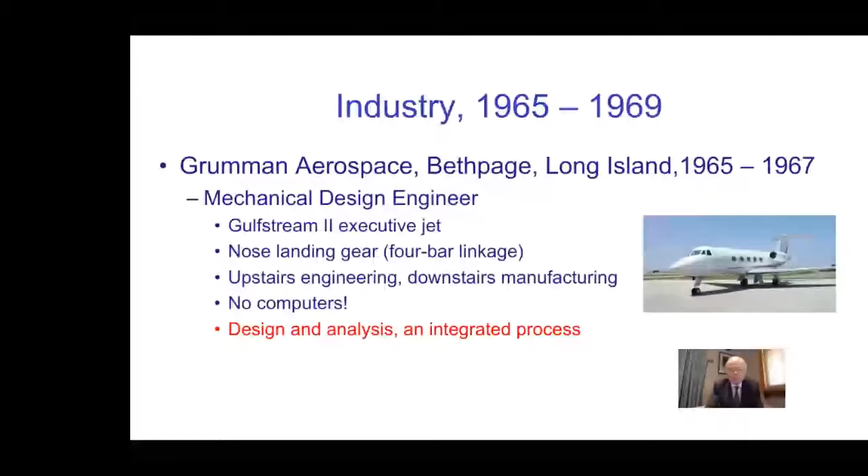So then, after I completed my master's, I went to General Dynamics Electric Boat in Groton, Connecticut, where submarines are built. And I was a research and development engineer. So that was a new experience altogether, and obviously one that had a great effect on shaping the rest of my life. Well, there we had computers, and we had a Univac 1108 with an enormous drum storage device. So this was a supercomputer at the time.

And the group I was in was very adept at matrix methods of structural mechanics. And those procedures had actually become sophisticated at that time. They were computer-based, but they were basically structures composed of beam elements, beams, frames, things of that nature. And they were doing calculations of over 10,000 degrees of freedom around 1965, which is amazing in retrospect, given the facilities that were available.

Now, in addition to beam-type models, they could model the hulls of submarines, the overall structure, internal and external, by using lattice analogies. And they employed the Hrennikoff method. So that was something that everybody in our group knew very well. It was developed by Alexander Hrennikoff, who did his PhD during the Second World War years at MIT. And he further developed that as a professor at the University of British Columbia the rest of his life.

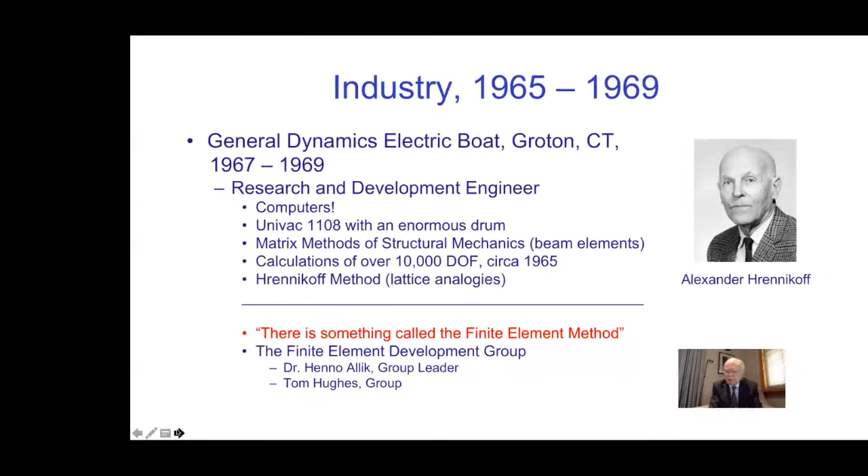Now, when did the finite element method really start? To me, in engineering, it really started around 1956. And there was an extremely important paper that was very influential that was published at that time, namely a paper of Ray Clough's in collaboration with Jonathan Turner, Harold Martin, and L.J. Topp. And that paper came out of Boeing's research lab. They were very active, as were many other aerospace industries, developing finite element type procedures. Now, the name had not even been given yet. Ray Clough actually coined the term finite elements sometime in the early 1960s.

Now, another seminal work on finite elements was the work of John Argyris in Europe. He divided his time between Stuttgart in Germany, where he had an institute, and Imperial College. And he published papers in the mid-1950s that were quite wonderful papers describing various ways of thinking about finite elements, the force method, the displacement method. And at the very end, you could see that he really had discovered the first, what you might call, continuum finite element, a 4-node panel element. And so these are the papers that I would say really started things going. Although it moved very, very slowly in the early years.

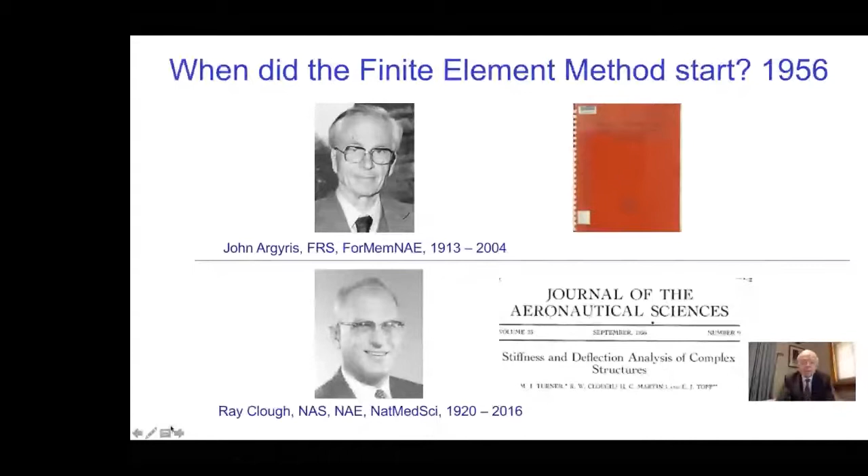So this is a plot that came from Web of Science, where I put in the topic finite element, and then looked at the number of papers published each year. You'll notice between 1956 and 1963, 0 papers. You find nothing. It wasn't until later that papers started to pop in. And of course, that has to do with 2 reasons. One is most people were publishing in conference proceedings and a few books at the time, and not in archival journals. But the other reason was, of course, that the name hadn't come about and hadn't stuck, and that was due to Ray Clough again in the early 1960s.

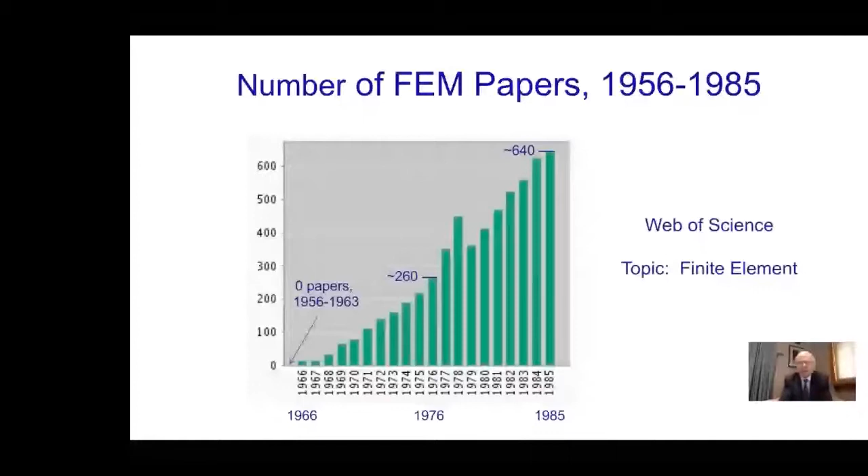So thereafter, papers started to appear, and they started to grow, and they were growing rapidly, but only a little bit faster than, say, linearly over the years. But after 30 years, in 1985, there were 640 papers that year. So that took 30 years from the inception, which is quite a long time when you think about it. And if you look at the number of citations, though, the citations to the paper were growing much faster. They were growing exponentially. But they only got up to about 3,000 in 1985, again, 30 years after the beginning of the method. So remember that number 3,000. I'll come back to that when I talk a little bit about isogeometric analysis later on.

So I decided that I wanted to pursue a career in research. I really loved research. And I applied to various places, but I felt the place for me and the one I really wanted to go to was Berkeley. They were active and one of the prime academic centers of finite element research, but they also had excellent mechanics and mathematics. And I had decided that's what I wanted to focus on. I would leave finite elements, patch up my background in mechanics and mathematics, and then perhaps come back to finite elements toward the end of my PhD or after I graduated.

I took many courses there. And one of the reasons I was able to take so many courses, and ones that I chose to take without any restrictions on my program, was I had a great advisor named Karl Pister. And Karl gave me complete freedom to select my courses. There were luminaries in mechanics and mathematics at Berkeley, and I took courses from many of them. Green, Naghdi, in mathematics, Smale, Kato, Marsden, Chorin, etc.

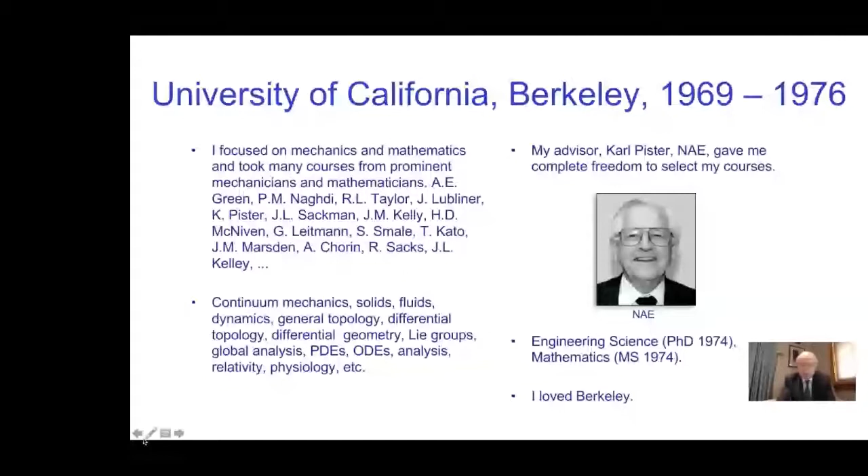Now, my thesis was actually in arterial pulse propagation, blood flow, fluid structure interaction, topics that I've come back to in later years. And that expressed my initial interest in cardiovascular problems. So that was in 1974. Now, my committee, during the time I did my thesis, which was actually over even less than a year, consisted of Kobi Lubliner here, who is famed perhaps in the mechanics community for his book on plasticity, Alex Chorin, who's a very famous mathematician, a National Medal of Science laureate, and Stan Berger in mechanical engineering. Now, Stan was the only person on the committee that really had an intimate knowledge of blood flow.

But when I needed signatures for my thesis, he had left on sabbatical, and I was not going to be able to get them in time. So we made a quick switch in the committee and put Bob Taylor on it. So he wound up signing my thesis, although he was not my advisor. I'll talk a lot more about Bob shortly, because we had a great interaction.

I should say, Kobi was a great thesis advisor. This was the old days. You didn't get a lot of direction. You just went off and you wrote a thesis by yourself and came back and sort of presented it to your committee to see if it was good enough. And I met with Kobi once about 6 months into my work and told him what I was doing, just orally. And he said, "That's great, write it up." So I did. And that's how that went in those days. This is a different business nowadays.

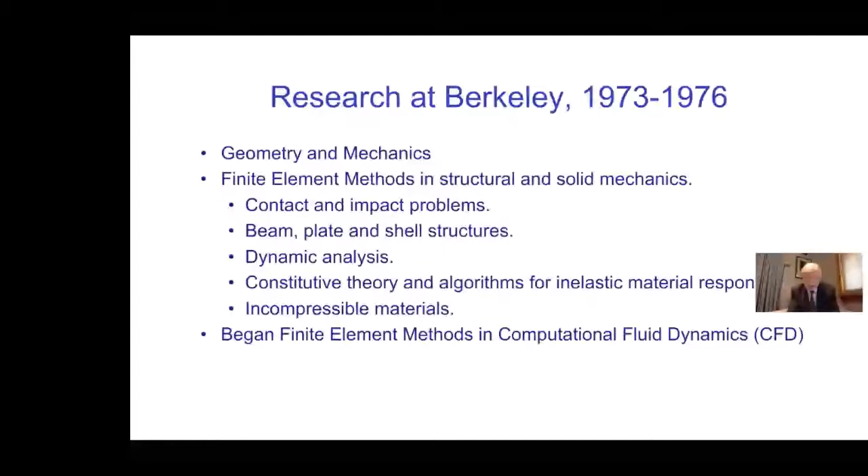I'd like to say a little bit about Jerry Marsden. I worked with Jerry on geometry and mechanics. I had taken all of the advanced sequences that were the types of mathematics that he was using at the time, global analysis, geometry, things of that nature. And he was to teach a seminar course on the use of global analysis in fluid mechanics and nonlinear elasticity theory.

So I decided to go talk to him and see what he was going to do. And I already knew more or less what he was going to do in fluid mechanics because he had written a wonderful paper on the incompressible Euler equations. And I asked him what he was going to do on nonlinear elasticity. And he said to me, "I really don't know. I don't know anything about the subject. I just hope I can learn something in time."

So I said, "Well, I know quite a bit about it. I could show you that." And he said, "Well, okay, here's the deal. Why don't you just take the course and write up about 10 pages each week and give them to me on nonlinear elasticity in the language I know, which was differential manifolds, differential geometry, things of that nature." So that's what I did. And that in some sense became the first draft of our book.

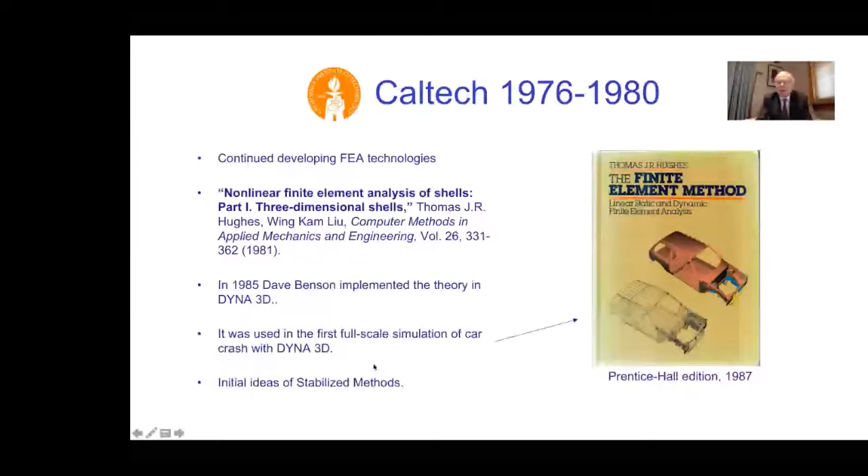Now, that elementary example of car crash really augured in a whole change in industry. Cars are now designed on computers. They're crash analyzed every day all around the world by every car manufacturer. And it's a very sophisticated business. So these are calculations with LS-DYNA.

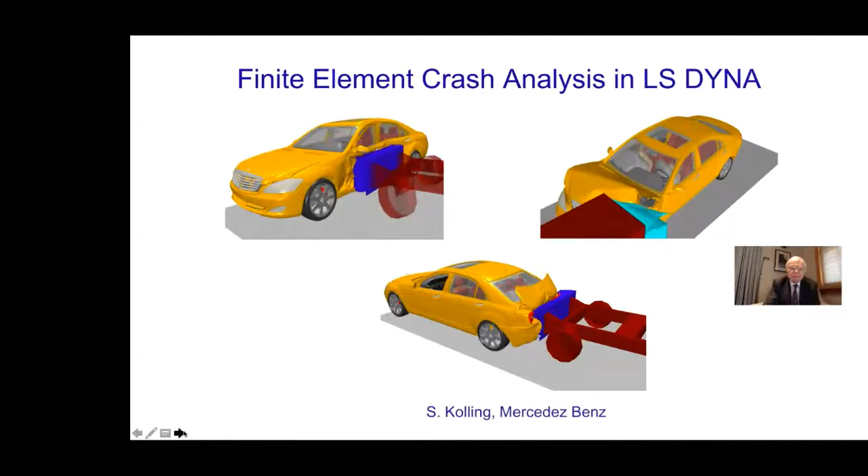So in 1980, I went to Stanford, continuing my research in finite elements, but I became more and more focused on computational fluid dynamics, especially compressible flows. I was getting support in that area from various sources, and the work was immediately put into some industrial flow codes like those at Dassault, and then ultimately at Boeing as well.

I continued developing stabilized methods and variational multiscale methods. And the basic mathematical theory for that was worked out by Claes Johnson and his colleagues. And that really cracked through, and we saw how these things could be essentially mathematically designed and analyzed thereafter. And I wrote a lot of papers on that.

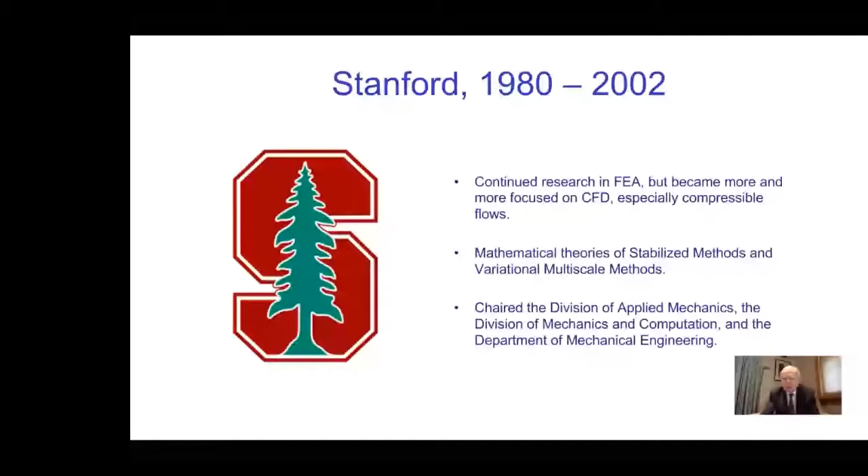At Stanford, I did some administration. I chaired the Division of Applied Mechanics. I chaired the Division of Mechanics and Computation, which it had morphed into, and for a short while, the Department of Mechanical Engineering. My proudest accomplishment as an administrator, and I have to admit that I was not a very enthusiastic administrator, was hiring these three individuals who became superstars in their fields of endeavor.

The first was Juan Carlos Simo, whom I think everybody knows for his work in computational mechanics. Huajian Gao, who is absolutely well known in this community as a speaker, I hope, if everything goes well, in a little while. And Andrew Stuart, who is now an outstanding applied and computational mathematician.

While at Stanford, the second edition of my book came out, my finite element book, the Dover edition. And I finally got out the book that Juan Simo and I had commenced many years before, but had been left dormant for quite a few years. So I was urged to get that out, finally got that out in 1998. And I think that's pretty well known in the mechanics community.

The major works that I did at Stanford concerned CFD applications, stabilized methods, variational multiscale methods, and patient-specific modeling of blood flow. So in the area of stabilized methods, the first and most famous paper, the SUPG paper, appeared in 1982. A couple of the papers in a 10-part series that I wrote, it was more on compressible flows, but this one was on the Stokes equations here.

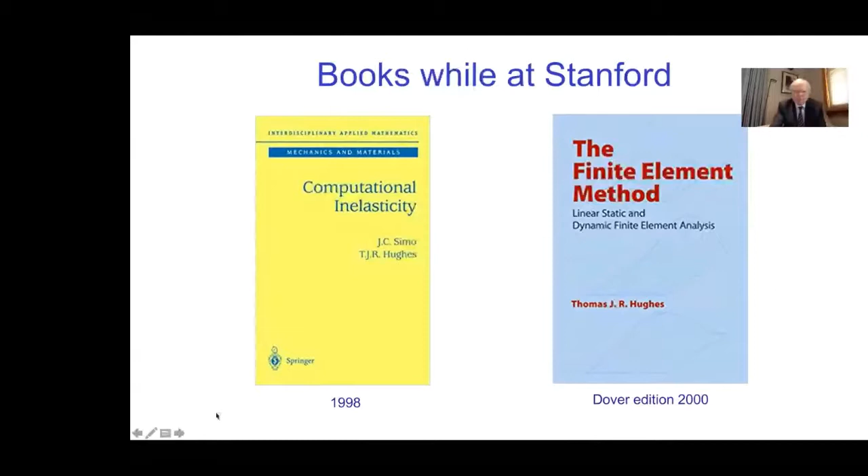It was how to circumvent the Babuška-Brezzi condition and develop stable methods that would accommodate essentially arbitrary orders of interpolation, equal order in particular. So that's had a lot of impact in analysis. It opened up a much wider range of interpolations to be used in CFD for incompressible problems. And then this paper is sort of a framework of some of the methods that we used in ultimately incompressible flow analysis, Galerkin least-squares method.

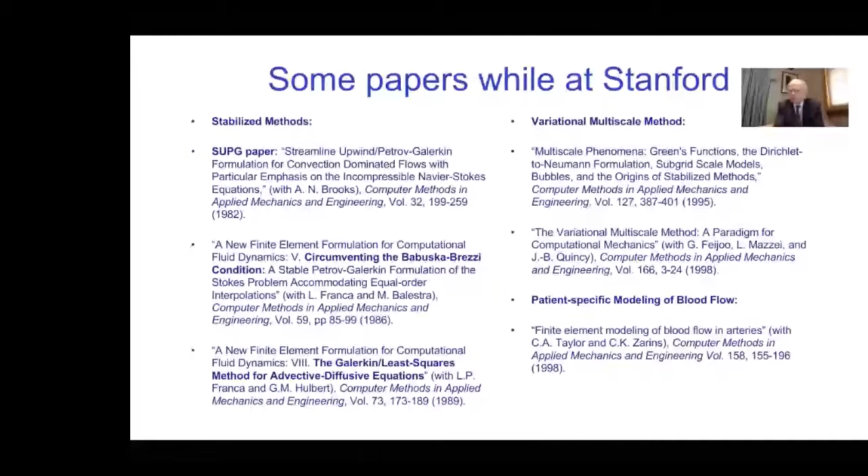The first two variational multiscale methods, which not only explained the origins of stabilized methods, but created procedures for multiscale analysis, modeling turbulence, for example, were these two papers. And then this paper with Charlie Taylor, my PhD student, and Chris Zarins, my colleague, who was the chief of vascular surgery, was the paper that really began patient-specific modeling of cardiovascular problems.

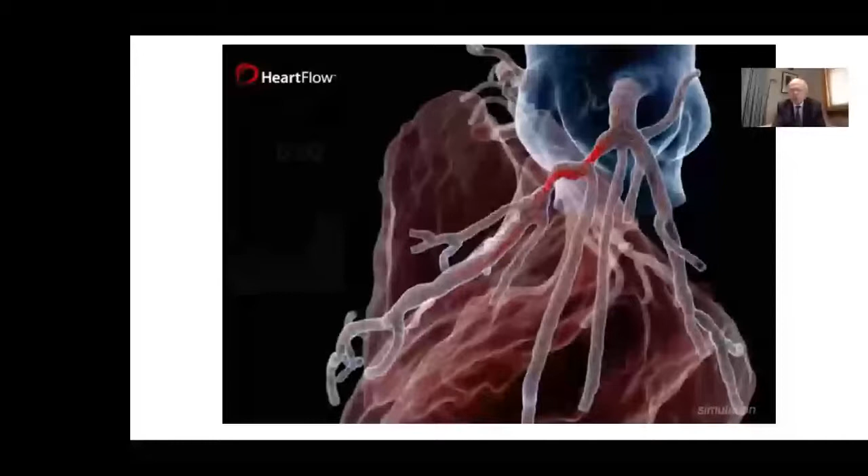And to make a long story short, and to fast forward, Charlie and Chris eventually left Stanford. Charlie became a professor at Stanford. They eventually left in 2007 to start HeartFlow, which is a company whose main product is a diagnostic technology of coronary artery disease. And what you can do with that is you can actually calculate the pressure drops, the so-called fractional flow reserve, that is a gold standard in cardiovascular medicine. And you can do it non-invasively, just from a CT scan.

Otherwise, if you do it in the traditional way, you have to insert a catheter, typically through the groin, thread it up through the aorta into the coronary arteries, and then thread it through a very vulnerable area where you have a stenosis to measure the pressure drop. So that company is now marketing this product. In fact, it was our patent, this technology, that was the first patent obtained by HeartFlow.

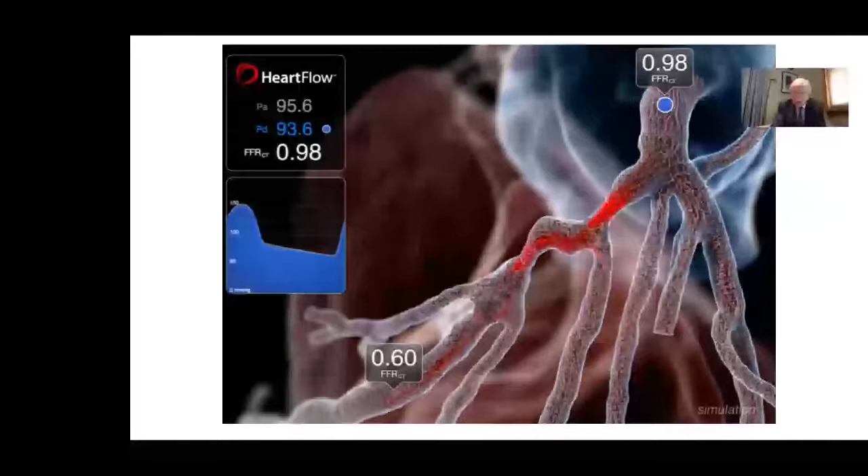So in 2002, after a long time at Stanford, I moved to the University of Texas at Austin. And there's a long story behind that. I don't have time to tell it. I'm often asked still, why did you leave Stanford? I'd say the very short answer is, in particular, Mary Wheeler and also Tinsley Oden. So I'll leave that as a little bit of a mystery, but Mary really started the ball rolling on that and changed my life. I've never regretted the move for a single second.

So what have I been doing at UT Austin? Well, continuing with computational methods, solids and fluids, got into phase field modeling with Hector Gomez and some of my graduate students, Victor Calo and Yuri Bazilevs, and also then later using phase field modeling and fracture with other graduate students and my colleague Chad Landis, who's also scheduled to speak.

In addition, I really started to spread out in my interest in computational medicine, continuing on work in cardiovascular disease with students and former students, and getting into prostate cancer. So we've published a few papers on that now in the Proceedings of the National Academy of Sciences, and some other areas. So I won't say anything about that because those are still works in progress, but some interesting other areas are developing in computational medicine. The signature of all of my work has been patient-specific modeling, trying to bring these technologies to use on individuals rather than just using the classical statistical and diagnostic basis of medicine.

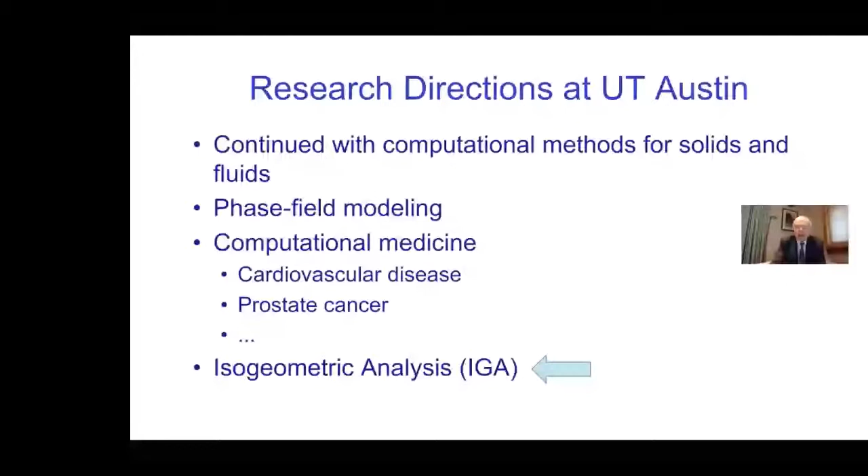The topic I would like to talk about is the one that I'm probably most well known for during the time at UT Austin. That's isogeometric analysis. So that began here, and it is going forward to this day. The motivation came from industry. It actually came from the shipbuilding industry. But there was a report that sort of demonstrated the same problem and essentially documented a lot of evidence of the problem. And it was very comprehensive and it's well cited.

It's the report out of Sandia National Laboratories that did an anatomy of the overall process of finite element analysis based on CAD representations. In other words, you have a product, you have a CAD design, and you have to build finite element models and do analysis, and then perhaps feed the results of the analysis back into the CAD designs. Well, in creating this anatomy of the process, what has been realized in many, many quarters in industry is that fixing CAD models, making them suitable for creating finite element models, accounts for a huge amount of overall analysis time, more than 80%. It's an enormous bottleneck in engineering product development.

In addition, you make so many simplifications in order to generate a mesh, geometry cleanup, feature removal, that often you throw the baby out with the bathwater and you introduce a lot of new potential errors in your geometric approximation. We see that all the time.

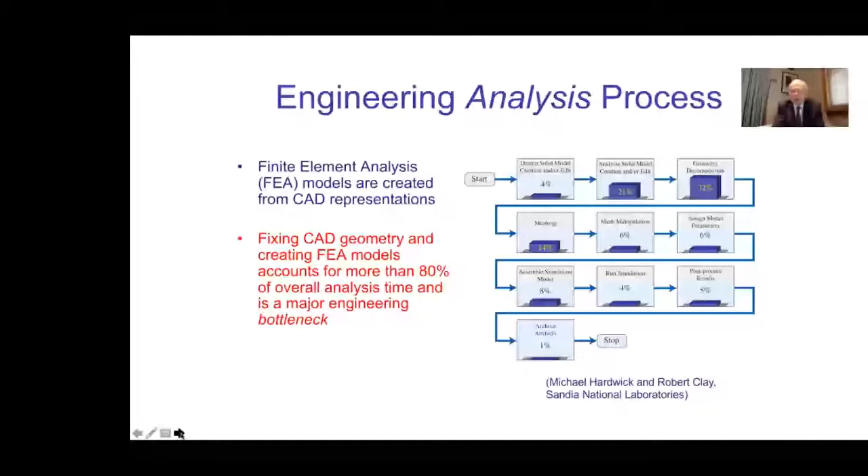So this comes as sort of a surprise to analysts. They think, oh, this must be trivial, not worthy of our attention, creating the meshes from CAD. You have to realize real engineering designs are very complicated. So the question, though, is why is it so time-consuming? Why is this time-consuming? Let me show you a trivially simple example, and I think you may appreciate what the problem is.

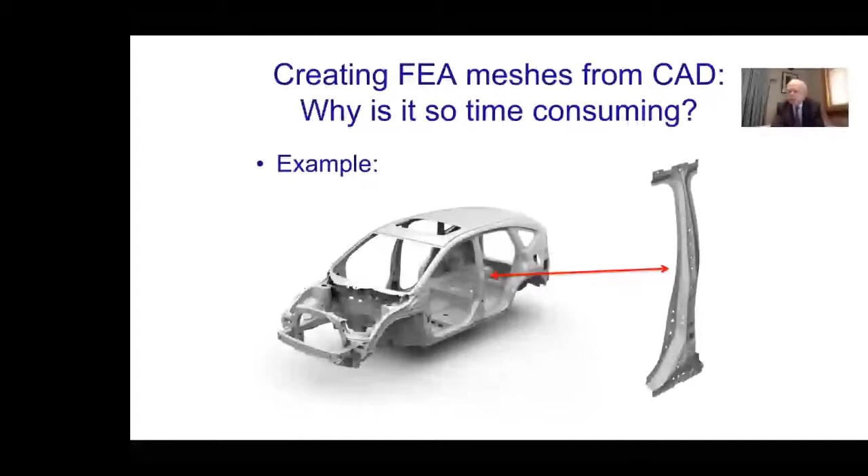This is a B-pillar of a car. It's a part. It's cut out of a single piece of sheet metal. It's stamped, bent, holes are drilled in it, that's all. You should be able to generate a quadrilateral or triangular mesh on that to do shell analysis very simply, you would think, right? But that's graphics. That picture is graphics. The actual data structure in the CAD file is not analysis ready at all.

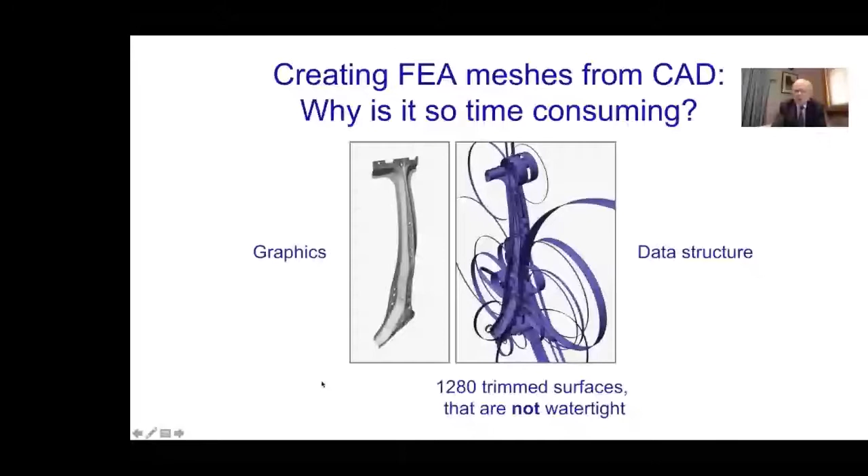It consists of mappings that are images of rectangular patches, so-called surfaces that are trimmed. And the trim lines between all of the patches are not watertight. So although this picture looks good, there are lots of gaps and overlaps between it. In this little single part, there are 1,280 such trimmed surfaces. You have to fix all that before you can generate a mesh. That's the problem. When you think of it, you scale it up to an airplane or a ship or a car, it's quite an ordeal.

So the objectives that I set out were to reconstitute finite element analysis within CAD geometry. I didn't believe CAD geometry was going to be changed. That was going to be a fixed point. That was my hypothesis. But I thought I could change finite element analysis to be more compatible with that, and thereby simplify finite element model development. So what I was after was the integration of design and analysis within essentially one geometric description. And that was the

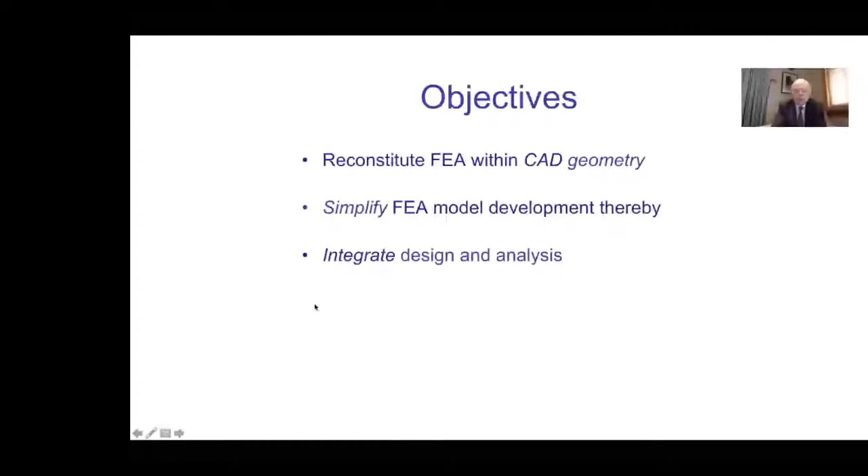genesis of isogeometric analysis. So it started with a single paper that I wrote with Austin Cottrell and Yuri Bazilevs in 2005. They were my graduate students at the time. And that paper started to get some interest, but it didn't really explode until a bit later. We also put out a book in 2009, which is an elementary introduction to isogeometric analysis. And then as time goes on, well, here is where we are in 2019.

In 2019, over 13,000 citations to isogeometric articles. There are now over 3,000 papers on isogeometric analysis. If you contrast that number after 15 years for IGA versus after 30 years for finite elements, remember for 30 years, the number of citations to finite element articles was about 3,000. So this is really growing significantly. And the accumulation of citations to IGA articles as of September 22nd was over 62,000. So it's having an impact, certainly in research circles. And now it's starting to move into industry.

So what is it? It's really based on the computational geometry technologies that are used in design, animation, games, graphic art, and high quality visualization. So you'll hear about things like NURBS, T-splines, U-splines. These are unstructured spline technologies. It includes the standard finite element interpolations as special cases. They become trivially simple within isogeometric analysis because the descriptions that come from these other computational geometry technologies are so much richer. So they offer you many other things.

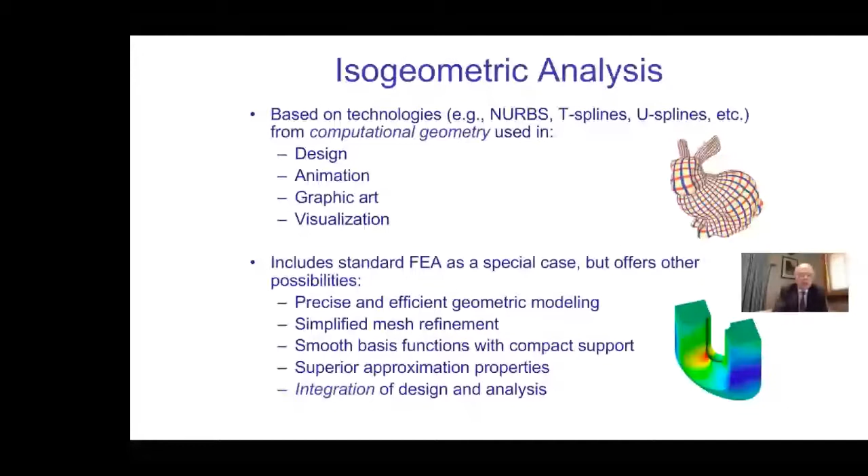So from an analysis perspective, what is it? Well, I think the way to think about it, it's an enlargement of the scope of finite element analysis. You can think of it as just new finite elements in some ways. But it is also a new computational geometry technology. Some of the things that have been developed in isogeometric analysis really have a very strong design implication.

But in finite element analysis, the way you get better results is you either mesh refine, that's h-refinement, or you polynomial refine. You keep the mesh fixed and you increase the order of polynomials. The secret weapon of isogeometric analysis is increasing the order of the functions. They may be rational functions, they may be polynomials, but you also increase the smoothness. And the approximation properties of those are absolutely superior. And that's what we've shown.

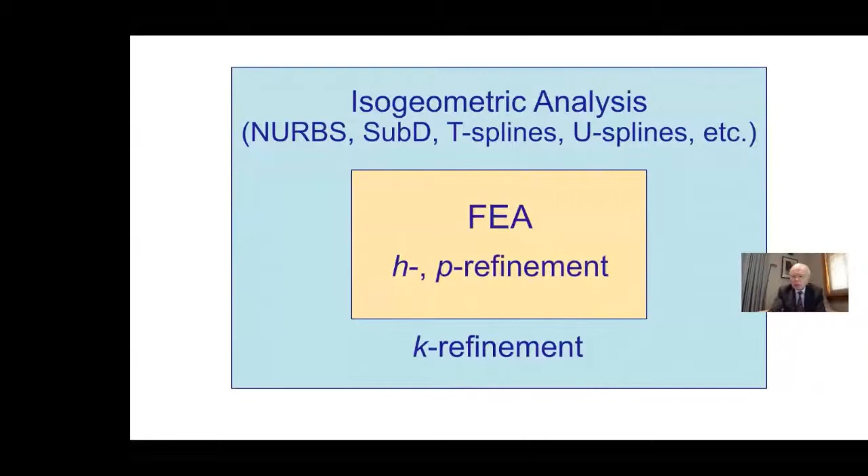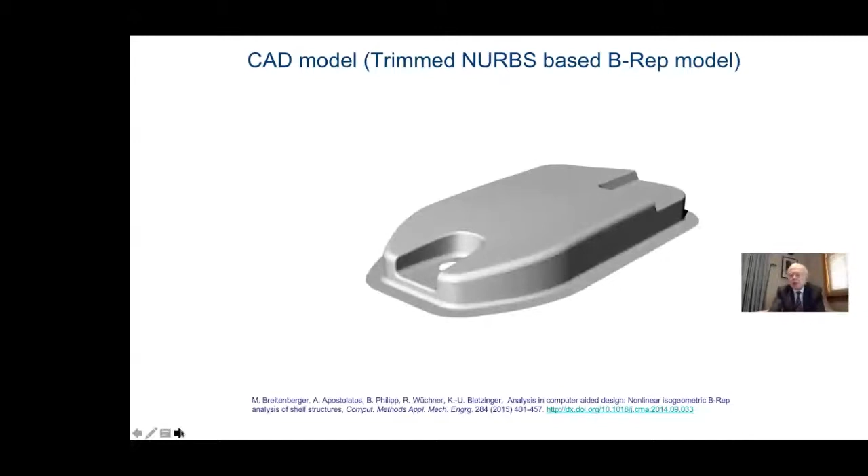Let me show you a few examples how it solves this problem of design through analysis. You have a CAD file. This is a CAD model of an oil sump, a car part. This is the trimmed CAD file where you've thrown away all of those parts that are not part of the actual object, and you show the so-called knot lines or the mesh lines of the CAD file. It has a mesh-like structure. You can see the mesh lines are not continuous from place to place, from patch to patch.

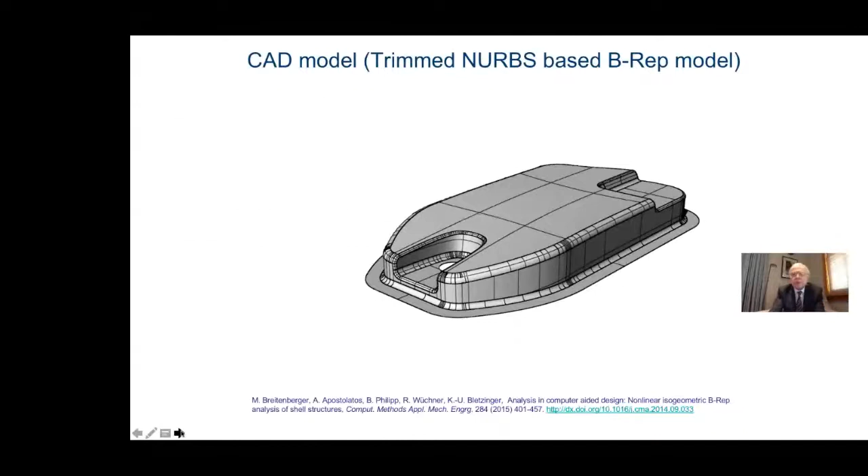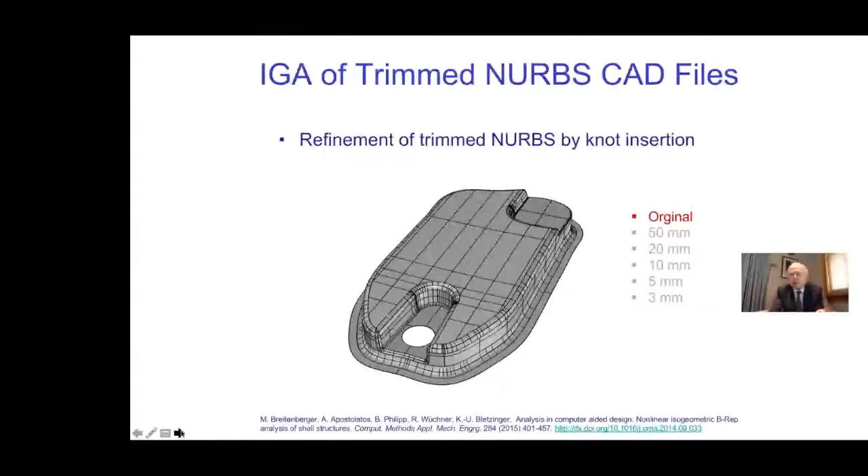This is the trimmed file. So this is what really is trimmed out of the CAD file. And what you do is you can work directly in that trimmed CAD file. Your analysis will take place in CAD. So this is it. Obviously, it's not a nice mesh for analysis because it has many unequal sized elements, huge elements, little elements. So to uniformize it, you can just introduce knots. It's extremely simple to refine meshes.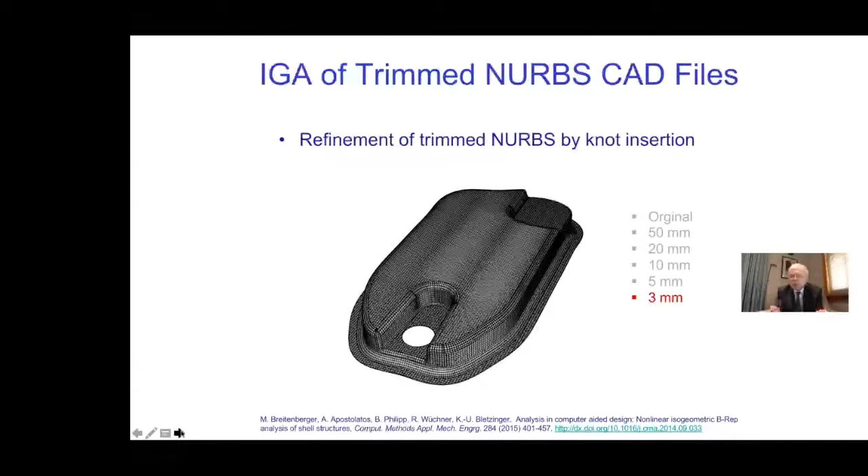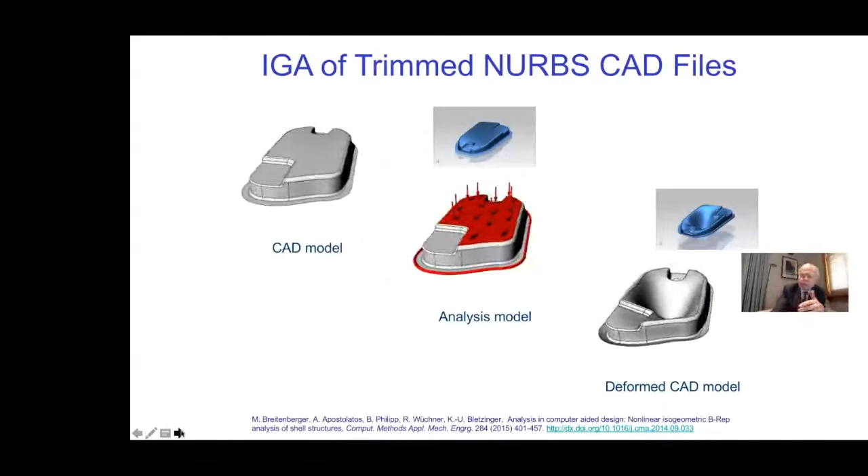Now you have a beautiful mesh ready for analysis, and it's embedded in the original CAD geometry. You never change the geometry. That's the power of the concept. And then you can do shell analysis. And the other beauty spot of this technology is you're still in CAD with your final analysis. So you don't have to figure out how to manually take the design changes implied by the analysis and find the CAD file and rework it. You are in CAD.

Now, the 3D analog of this is the subject of immersed methods. Now, this is a beautiful CAD file. This is actually a watertight T-spline, an unstructured T-spline CAD file. And it's a surface file, but of course, this is a solid object, and you want to do a solid analysis of this, a 3D analysis.

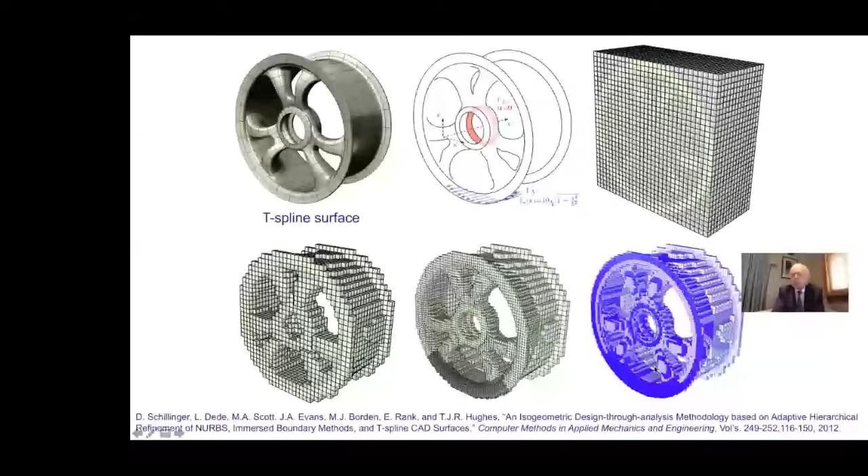So what you can do, in the same spirit as the previous example, is drop this into a box of B-splines, throw away all of the Bezier elements of the B-splines that don't intersect the object, do local refinement where you need it, and use this immersed technology now with cut elements to solve the problem. This is just a quadrature mesh over here. And then you get a 3D analysis. You can fully automate that process. It so simplifies things, it's just amazing.

And I think the next example will illustrate to you the degree of simplification that can be shown with these isogeometric methods. This is the original dirty CAD model of some type of a very complex bracket. Dirty CAD models are typical. They have gaps and overlaps. And before this was subjected to healing software, it had 3,361 edges that were not coincident. They were not watertight, so there were gaps and overlaps.

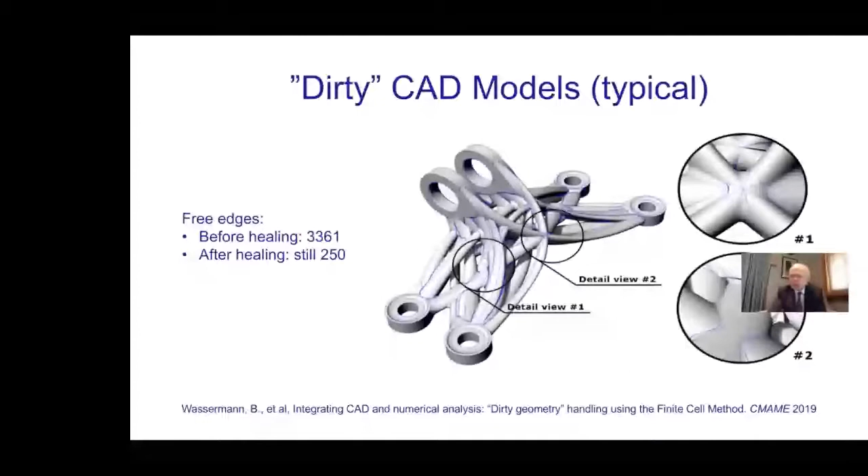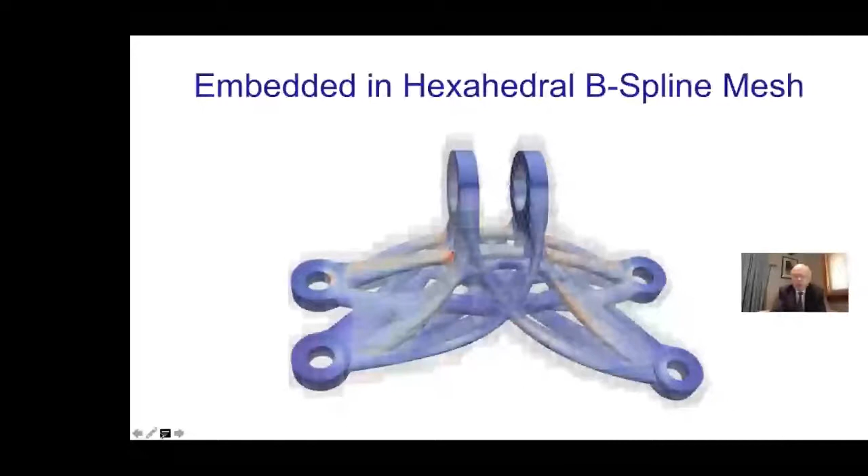Now, healing software helps a lot, but this is really a complicated little gizmo here. After healing, there were still 250 edges that were not watertight. So you have to fix all that, and that has to be done essentially semi-manually before you can generate a mesh. And to generate a solid mesh for this would be a nightmare under any circumstances, even with the best mesh generators. But again, what you can do is just drop it into a box of B-splines, throw away the elements that don't intersect the object, and perform three-dimensional analysis, linear and nonlinear.

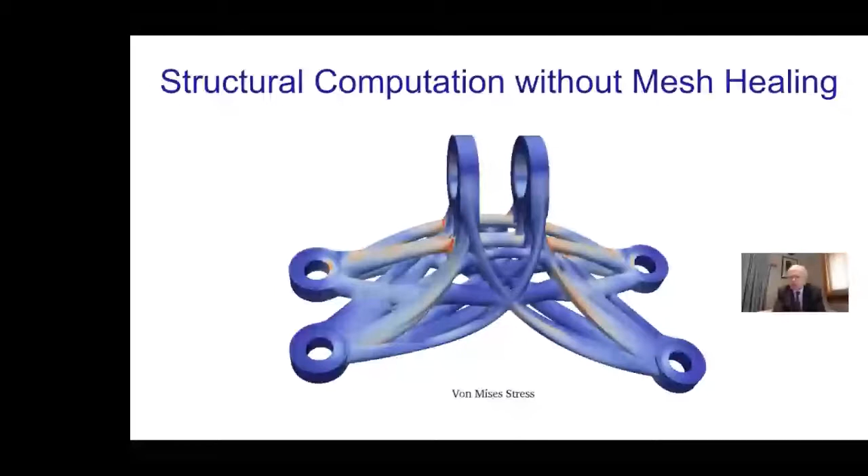And the further interesting thing about this technology is you don't even have to do any mesh healing. Those gaps and overlaps are very tiny, they're very small, and you can take care of that in the process of solution. It's no problem whatsoever. So you can do essentially automatic 3D design through analysis computations like this. So it's a technology that's continuing to be developed, and it's having its impact. But let me contrast its trajectory in the world with finite element analysis.

Finite element analysis started primarily in industry, in the aerospace industry. It migrated from there to academia, and then to other disciplines, civil and mechanical, etc. Commercial CAD and FEA software, the industries grew up completely separately. They just didn't pay any attention to each other, and that created the problem. And IGA was really a look back at the problem and a response to industry needs. But it started in academia, in my group at UT, and it has been migrating from there to industry. And now more companies are starting to pick it up and put it into service.

And for example, it's been pioneered by LS-DYNA and LSTC software before it was acquired by ANSYS. Now it's part of ANSYS. They pioneered IGA software in industry. So it's still a work in progress, but it's expanding rapidly, and it's still an exciting area of mathematical and computational mechanics research. So with that, let me just sort of sum up with my philosophy of what it is I do as a computational mechanician. What do we do that's different from what people do traditionally?